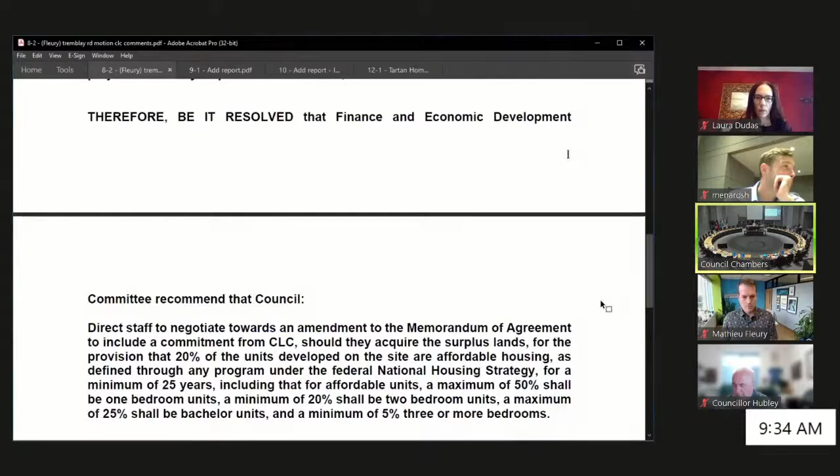I don't think it's necessary for me to read those, but I will read the 'be it resolved' that the Finance and Economic Development Committee recommend Council direct staff to negotiate an amendment to the memorandum of agreement to include a commitment from Canada Lands Corporation, should they acquire the surplus lands, for the provision that 20% of the units developed on the site are affordable housing as defined through any program under the Federal National Housing Strategy, for a minimum of 25 years, including that for affordable units: a maximum of 50% shall be one-bedroom units, a minimum of 20% shall be two-bedroom units, a maximum of 25% shall be bachelor units, and a minimum of 5% shall be 3 or more bedrooms.

I am agreeable to the motion, and Councillor Fleury is with us to answer any questions. Thank you, Mr. Mayor.

So Councillor Fleury, with the will of committee, would you like to speak to this, since I know you're not able to stay, and have an appointment later today? Thank you, Mr. Mayor. I want to thank Peter Radke as well as the local councillor for working with me on the complexities of federal lands being transferred between federal agencies.

So we want to make sure that the value the land is appraised at reflects the intentions of the affordable units. We worked closely with Canada Lands Corporation, Tara and her team, to draft the wording of the motion. I believe Peter Radke from real estate, as well as Tara from CLC, are comfortable with the wording presented today.

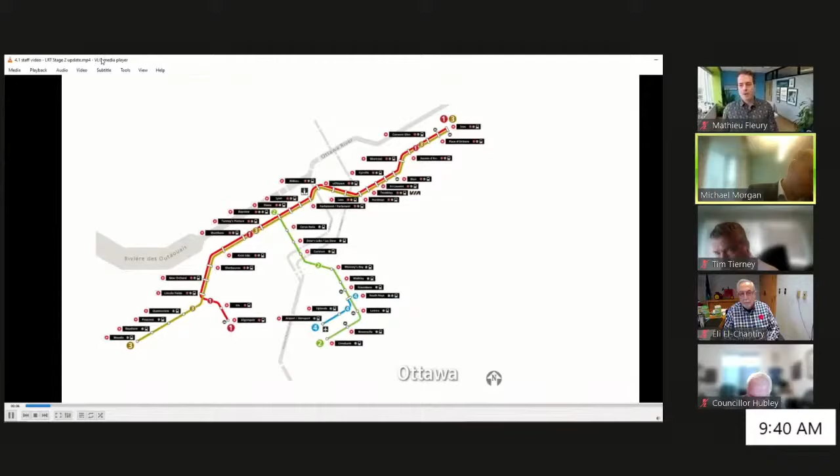Very good. I think we have a video to start, so we'll start with the video if the clerks could bring that up. So your mic is a little off there, Michael. Are you using a regular mic? I can switch, I'll switch while the video starts. Yeah, it seems quite echoey. So I think your video is running now.

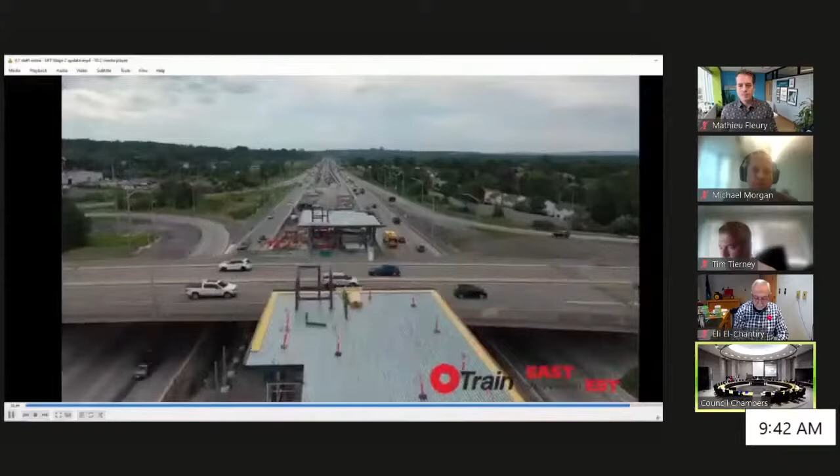So as you can see from the video, lots of progress on the two lines there. I'll bring up the presentation here just to give you a blow-by-blow update on the construction in the various parts of the city. While that's going, I'd note that in the video we showed one little section of the cut and cover tunnel — that was actually the first section of the cover being covered over. We're topping out the tunnel in many sections along the SJAM Parkway, and we've actually covered about 200 meters out of the 2.8 kilometers that we need to do. So still lots more tunnel to build, but we are making progress.

So we'll go right into the second slide, which is just a reminder of all the things that Stage 2 is bringing: 77% of Ottawa residents within 5 kilometers of light rail, creating 27,000 full-time jobs, the system capable of carrying up to 24,000 customers per hour per direction during peaks at the ultimate build-out, replacing more than 900,000 annual rush hour bus trips, and reducing up to 110,000 tons of GHGs by the year 2048. So lots of changes, lots of benefits coming with the project.

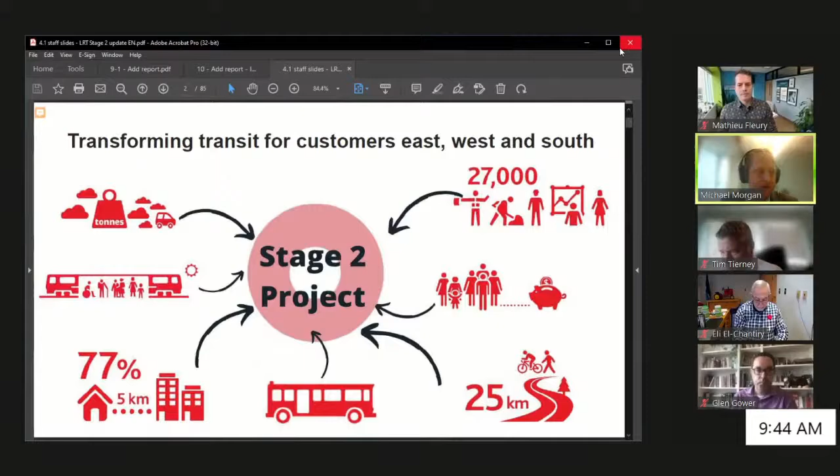We focus a lot on the construction progress. So if you go to the next slide, just to show you a reminder of the renderings available on the Stage 2 website. This is a shot of Moodie Station at the end of the line, where we're adding a new bus loop, and this is where connections will come from Kanata in the future and other local routes. As you drive by this area now, you can really see the elevator banks and other elements coming out of the ground very quickly. So a lot of progress at this site. If you go to the next slide.

So in terms of 2022 general progress, by the end of the year we'll have construction started at all the stations across the entire line. The last couple of stations to come online are Kitchissippi and Westboro. Kitchissippi is continuing to do excavation at that location. Rail installation on the O Train East extension is progressing, you can see a ton of rail now down in that area. And for cut and cover, I pointed out that small section of the cut and cover tunnel that's been covered.

The Stadler Flirt vehicles are coming, and the Alstom Citadis vehicles are still being manufactured and delivered to site. By the end of the year, 7 of the 11 pedestrian bridges we'll be building will be set in place, not open for service, but certainly available to show progress on those points.

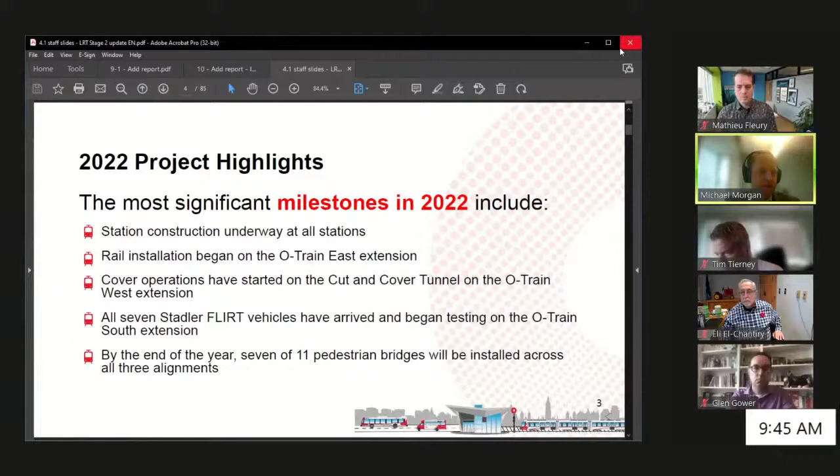So let's go give the general construction updates on the next slide. We'll go through this quite quickly, starting in the east. There are a couple of before and after shots in here.

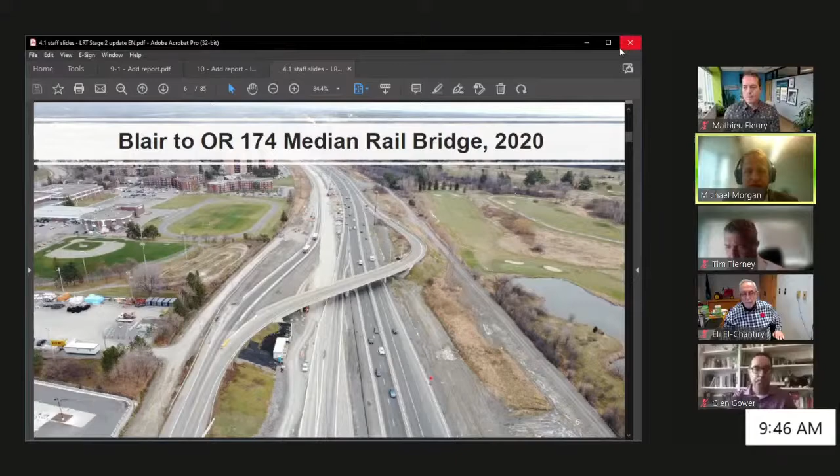Here you see the before in 2020 with the old transitway structure there. We saw in the video it getting torn down earlier this year, and obviously the flyover is in place now, and that road is in pretty good shape. If you go to the next slide, you see the new flyover that will be taking the trains to the center track. A lot of progress here, we've basically stabilized construction through this area. Now a lot of the effort is on the bridge itself, putting the track in place, and then closer to Blair doing the tie-ins.

So Montreal Station - a lot of work was done the last couple of years to make this space available to build the station. This is the view from up top, and you see the 2 elevator banks at either end of the platform, which will provide access from Montreal Road. Still doing tidy up, still doing work on Montreal Road itself. There's still some utility work to do, but the station is coming out of the ground nicely. We're trying to get all the electrical rooms in place so we can start doing communication system and signal system installation next year.

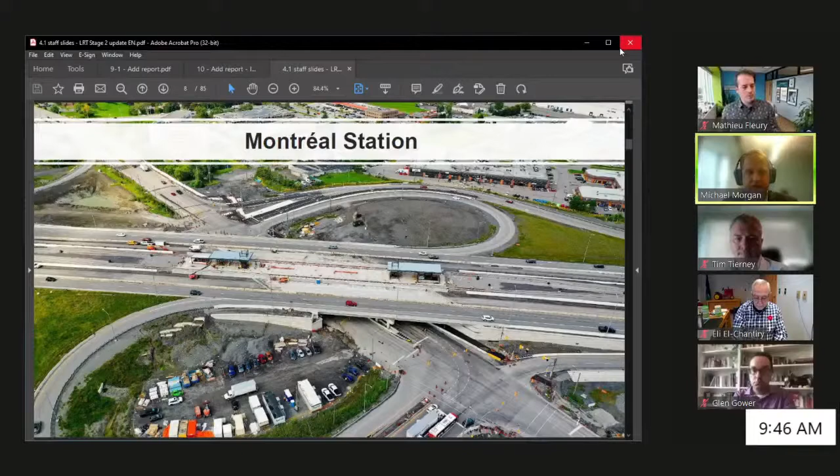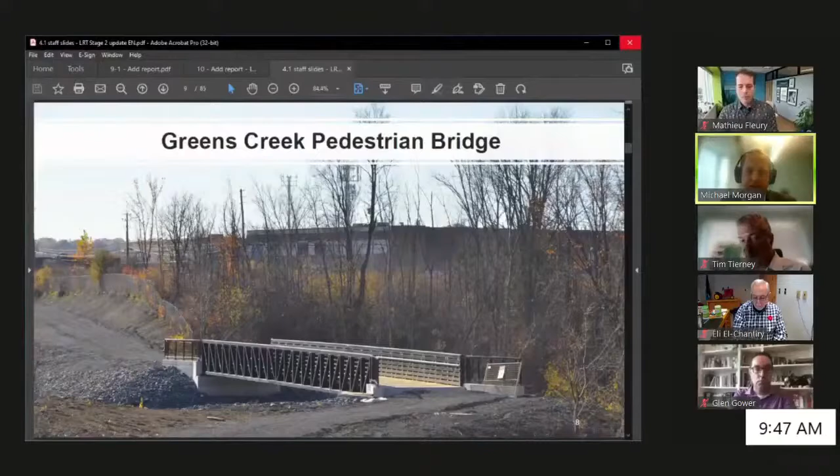Greens Creek pedestrian bridge - this was dropped in earlier in the year. This is still being worked on, the pathway that connects here all the way back to Blair. There's a lot of construction taking place to make that pathway from Blair to this location, but it is exciting progress here to see this bridge in place.

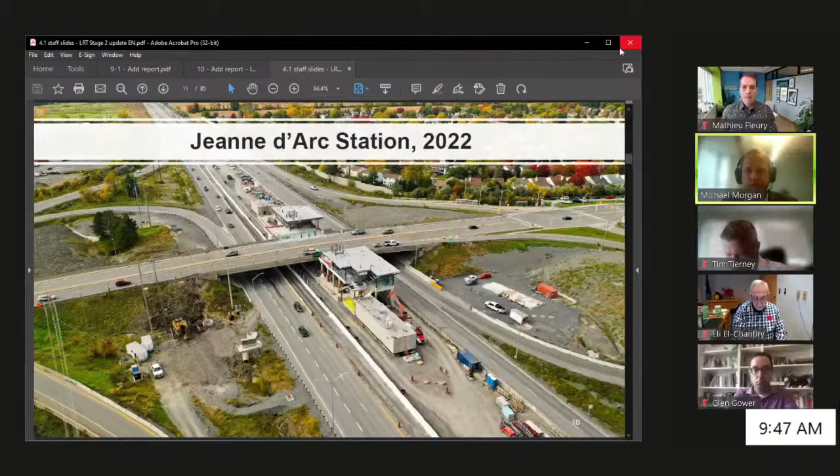Place d'Orléans Station - you see there are 2 structures here. The one on the left is the access for pedestrians coming from Champlain Street, and the one on the right connects to the original pedestrian bridge, and then to the new pedestrian bridge, which will enable people to transfer from the bus without having to go through a turnstile or fare gate. So you'll be able to transfer directly from here to the train. There's also one long escalator going from the structure on the right down to platform level, because there's quite a grade separation - an elevation change - at that location.

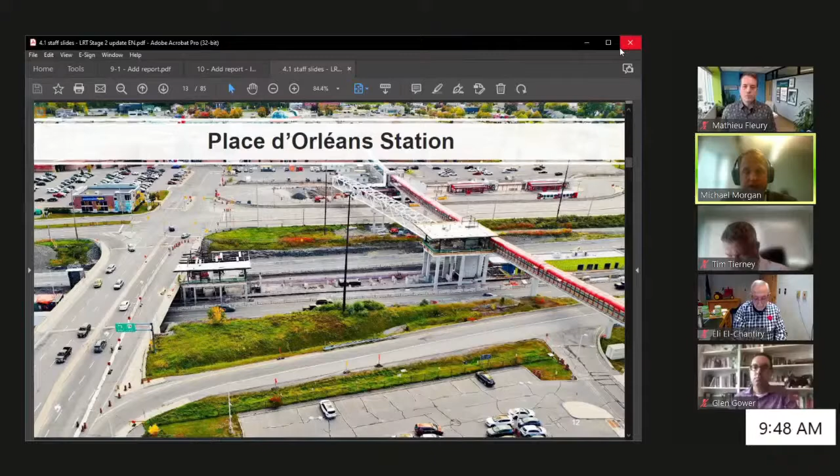If you go to the next slide, it'll show a slightly closer up picture of this new pedestrian bridge that we're putting in place.

So there's a bunch of rework that we need to do with the bus loop to enable the transfer and ease of transfer at this location without having to go through a fare gate. But at the end of the day, this provides significant extra capacity for people coming and going from the LRT station and the bus loop, in addition to the red pedestrian bridge there, which is the free-flowing pedestrian bridge to get to the mall.

Go to the next slide.

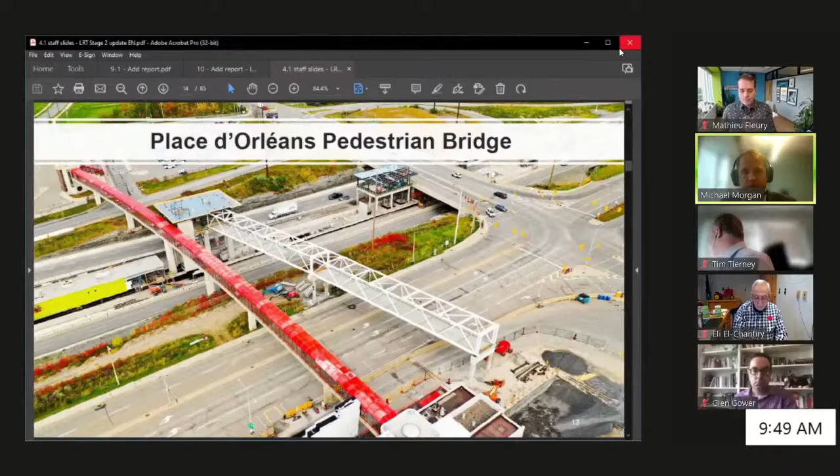Go to the next slide, please.

So Trim Station. It's a little difficult to make out, but there's one dark gray hydro pole just to the right of the page, and just to the left of that, there's a couple of pier caps, which are for the pedestrian bridge that will take you to the LRT station.

So we're going to have to do a closure of Highway 174 at this location to be able to drop that bridge in place, and then we'll have a pedestrian bridge basically dropping down to a new building entryway with the fare gates in the bus loop.

And again, this location will have free-flowing access for buses that drop passengers off, and there will also be a set of fare gates for people coming in off the street. So that pedestrian bridge will drop people into the LRT station at this location.

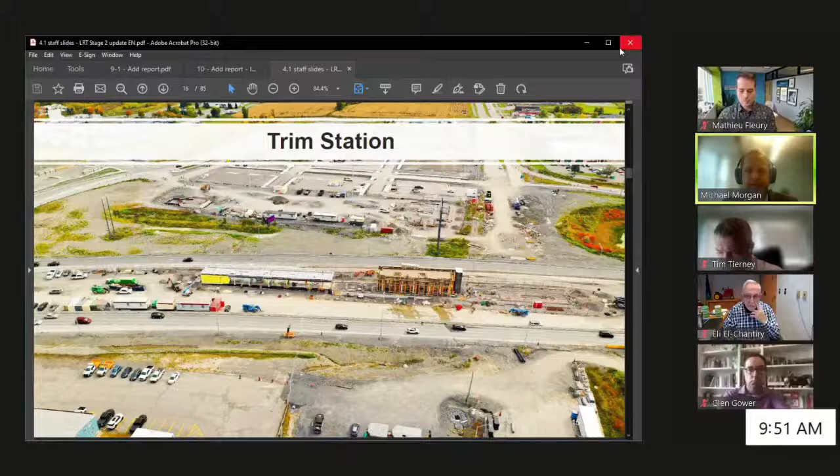So the upcoming activities: as I mentioned, the pedestrian bridge, progress on all five stations, completion of rail installation. And then next year, we are expecting to see our first train movements in this area. That's a very exciting milestone for the team, when you'll see the train in the middle of the 174 next year. Very excited about that.

If you go to the next slide.

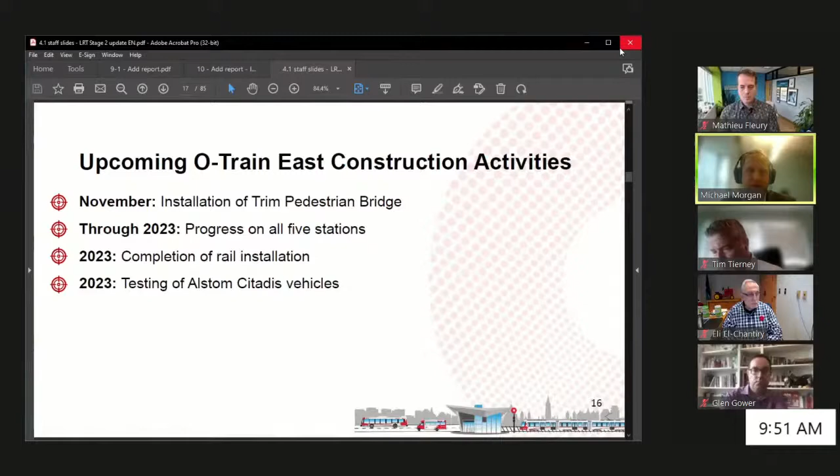Just in terms of the project, the latest update from the team is that they are 36 days off the original schedule, so they pushed it to January 1st. That being said, the end of the schedule has some float in it, and there's an opportunity to discuss with the builder what the handover process looks like. So we're doing that now, trying to recover those days, but generally the east is still on schedule.

Go to the next slide.

And then just finally, the mobility impacts in this area: weekend closure for putting that trim pedestrian bridge in, still a variety of lane closures kind of on and off, some late night stuff. And then on Montreal Road, there's some more utility works that need to be done at the station. So still some remaining impacts on the highway, but generally not like what we saw a year ago in terms of the super weekends and the continuous activity.

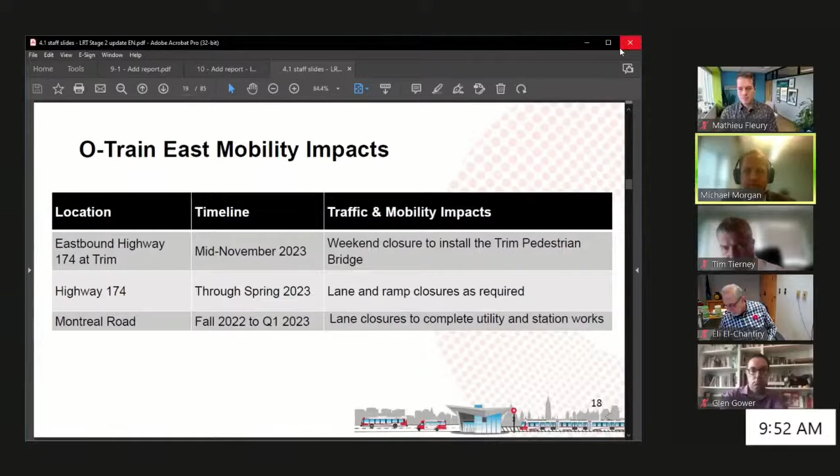Talk about the west, so just starting near Tunney's Pasture. You can see this is the old transitway. It's already been excavated, so they're in there now doing utility works. There's a big box culvert that needs some repairs, so they're going to do that work. There's a bit of a ramp down here to get into the guideway to start that retrofit work and make that connection to Tunney's. Go to the next slide.

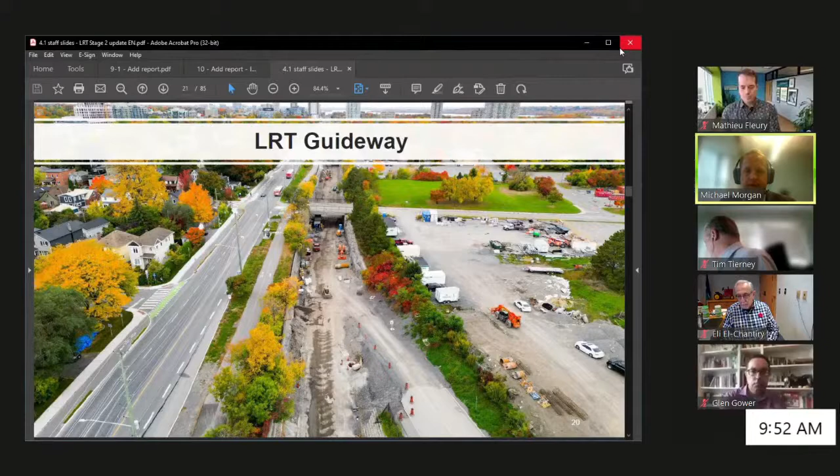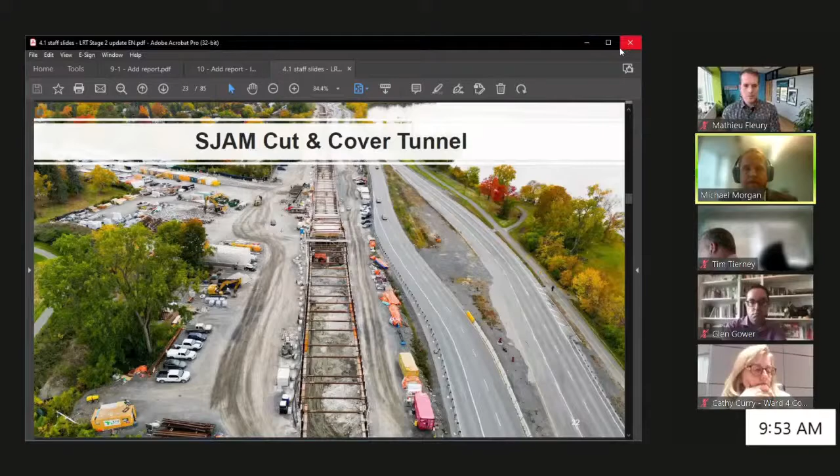Here's a shot of the tunnel getting closer to the homes, and just kind of hidden behind the header there is actually where we cross the road to get into Richmond. There's been a lot of discussion about that area, it's a very sensitive area. The tunnel's being built over the West Nepean collector, so there's a lot of sensitivities with that final connection across the road into the station location. A lot of work at this location, the SJAM in its entirety, and doing pretty well so far to keep the water out of that tunnel, but you see how close we are there to the river.

Here's the road connection where we need to cut across the road. This is a tough spot because there's a lot of big utilities here and we're over that West Nepean collector. What you see in the middle of the page there, they're starting to put together that Everest form to be able to build the tunnel. So they are making progress, moving on multiple fronts, but there are still a lot of challenges and sensitive areas to get through on this cut and cover tunnel.

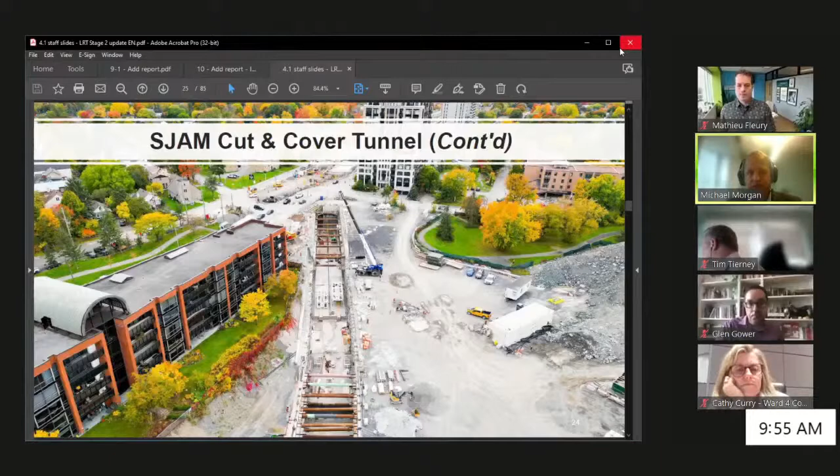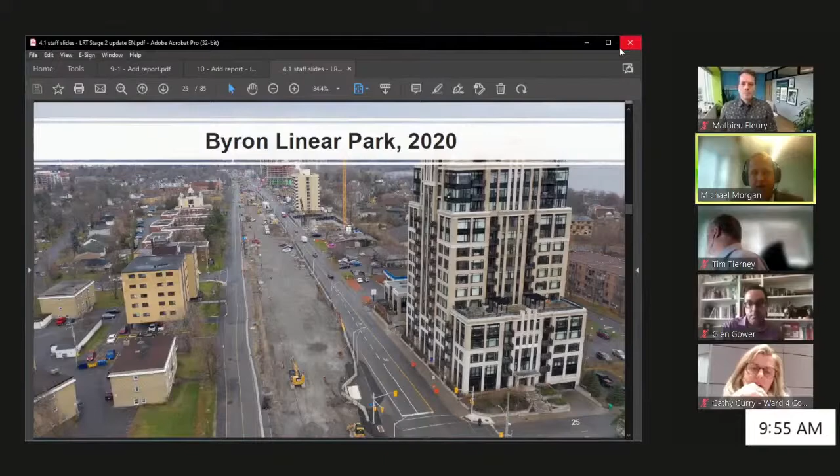Here's again a before of Byron Linear Park in 2020, and then the next slide shows you a bit of the after condition, not in the exact same location. You see the orange formwork at the bottom there is where we're building tall walls for the station, so those have to have an architectural finish. Then in the distance, as you move up towards the top of the page, you see the formwork come into play.

The guideway narrows because it goes from the station location, narrows to just the tunnel location. So a lot of work in this location, a lot of activity. Doing each one of those pours, like the orange formwork on the bottom left, takes about 12 hours, and there's a lot to do. On a regular basis, we're having to park concrete delivery trucks and pumper trucks on Byron Avenue to build those walls.

Here you see more of the covered section. Part of this, we do need some of the space for detours to make more space, but they are working quickly to try to get across here. I don't have a date on when the backfilling will start, but that'll be a big step. You see at the top of the page there's a bit of a plug where there's a road access, and what they'll do is shift that road access over the tunnel so they can finish off that section. They'll do that progressively as they move through the tunnel area.

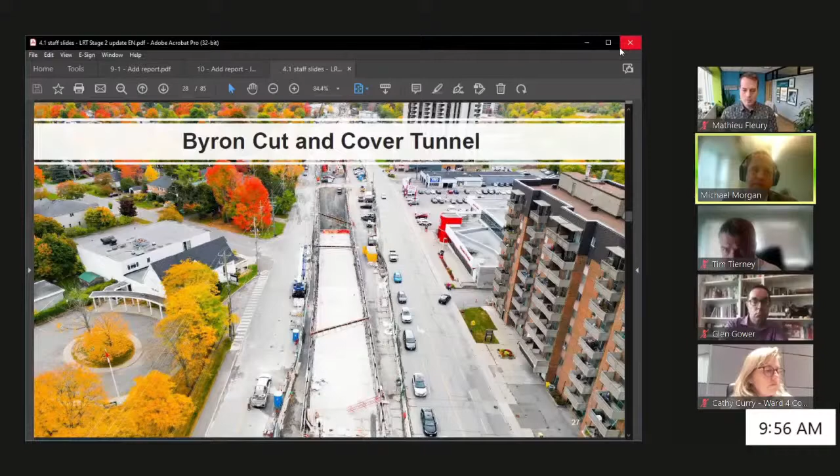This is just a close-up of the formwork after the fact. You see how you get a very good finish on the concrete there with the Everest form system. Good progress there, and roughly 200 meters of the 2,800 meters has been completed to date. So next year is going to be a big year to make progress on this, and they are going to work on these sections over the winter, doing as much as they can. They've come up with a temporary tent structure that they're going to move along the guideway to help them continue the progress of this work during winter.

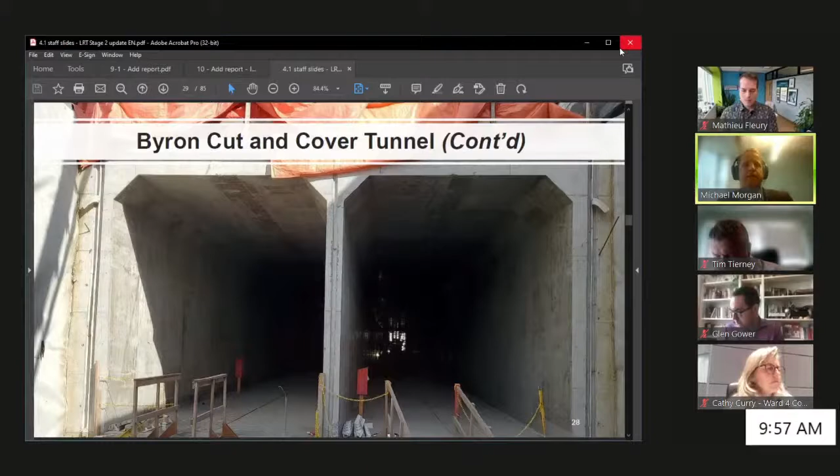We're adding a new ramp to get buses down to the new lower loop. We'll show you on the next page the current status of this location.

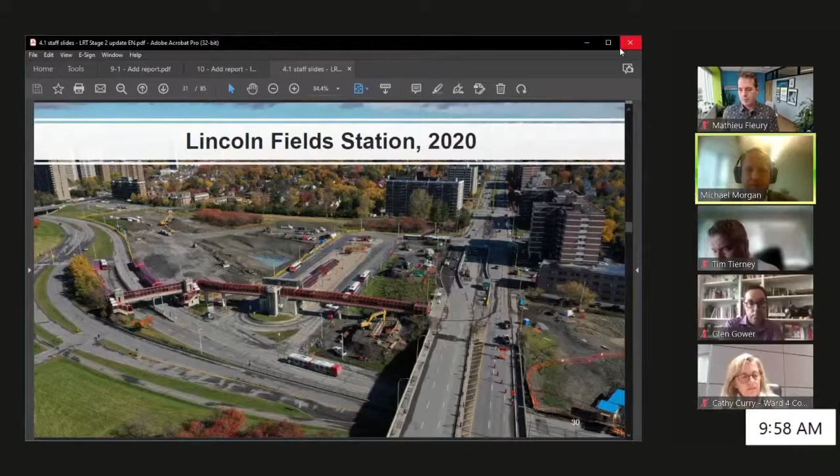So at the bottom of the page on the left, we've built a new temporary bus loop. You see the old pedestrian bridge for the transitway coming apart. Right now buses are navigating across on the top left where the guideway is going to run, so we're actually going to have to detour the buses using a new ramp to stay away from that area as we build the guideway, basically on this page left to right. And on the right-hand side, Carling Avenue, we've had to put in a new bridge and build a structure to make space under the tunnel for the LRT at this location.

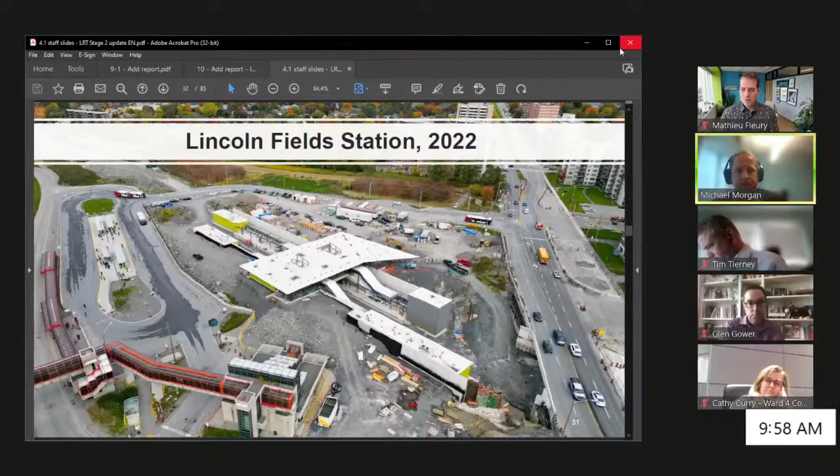Just another shot of Lincoln Fields Station. Here you can see the new bridge on Carling Avenue where we've created space for the LRT to go underneath. On the right-hand side is where the temporary bus loop is, and in the end state the bus loop is actually on the left of the screen. Where those trailers are parked, that's where the ultimate configuration is going to be.

Carling Avenue Bridge there. So we are making space, and we are reallocating some of the sidewalk space to the system to make it as friendly as possible to get to the station. If you go to the next slide, please.

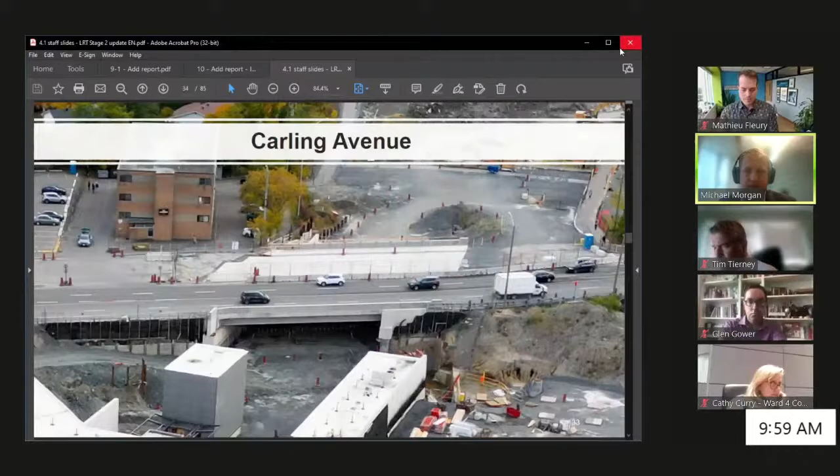Just a little bit further down the line, you see Lincoln Fields flyover, and then in the distance you see the Woodroffe pedestrian bridge there. So a lot of work happening in this area.

We are keeping the transitway in this area open as long as possible. The transitway will stay open and will be maintained in parallel with the new LRT guideway that we're building, that goes up to Iris. But a lot of activity, and we need to basically make the connection through this location back to Lincoln Fields. That's where you have a 3-track station, and that's where the trains split - trains will go south to Algonquin, and then trains will go the other direction to Moodie.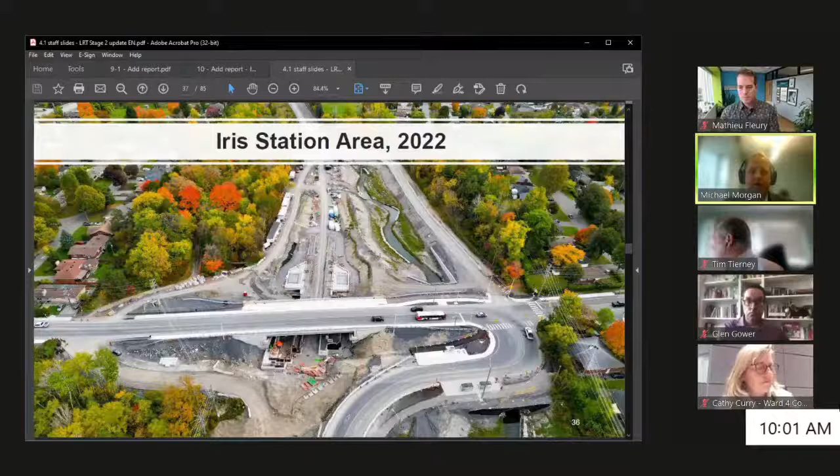Algonquin Station. On the right there's a pier where the new pedestrian bridge is going to provide a direct connection from Algonquin into the station. The station's coming together very nicely. There'll be a bus loop connection here. This is one of two buildings being built, and then the station at this location is underground.

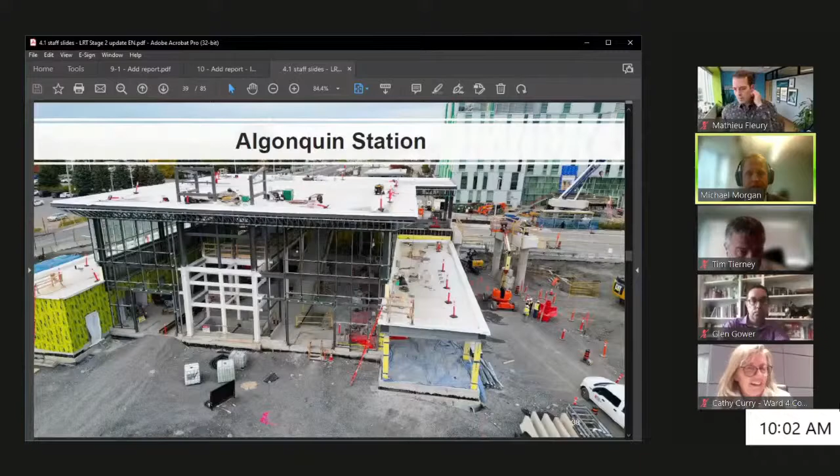Switching from Algonquin Station, the southern leg, back to the leg running to the west, Queensview Station here. This is what you can see on the right-hand side in the middle of the page. There's a bit of a green area where a footing is going to be poured. We're putting in a pedestrian bridge over the highway so people on one side can get to Queensview. Top left, hiding behind the banner, is the existing Pinecrest bus garage. We're doing a lot in this area to improve connectivity, providing good access to the businesses and homes here.

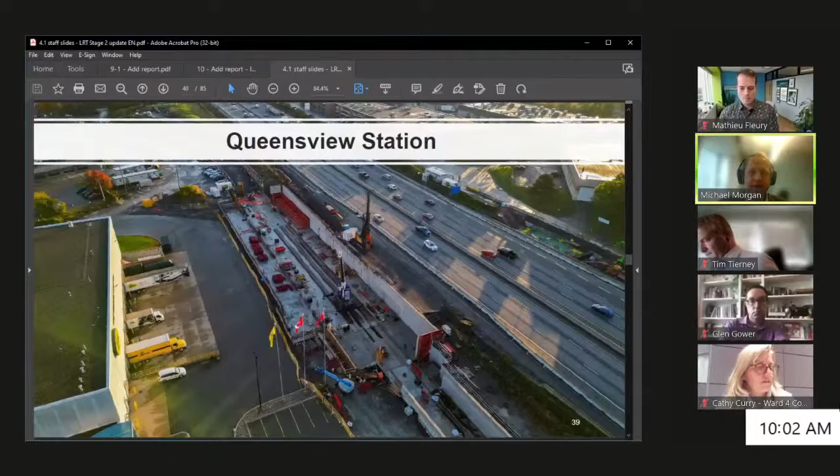On the next slide you'll see the progress on the station. We've moved ramps out of the way to make space for the station and created a bridge structure that we pushed in place last year. So the structure - you see the one ramp with the blacker looking pavement was rebuilt, and the Pinecrest Station there is coming together. Those struts that go across the two walls are permanent, and there'll be a bit of a bus loop on the upper location of the page, and off the screen is all the new ramps we're rebuilding to make space for the LRT.

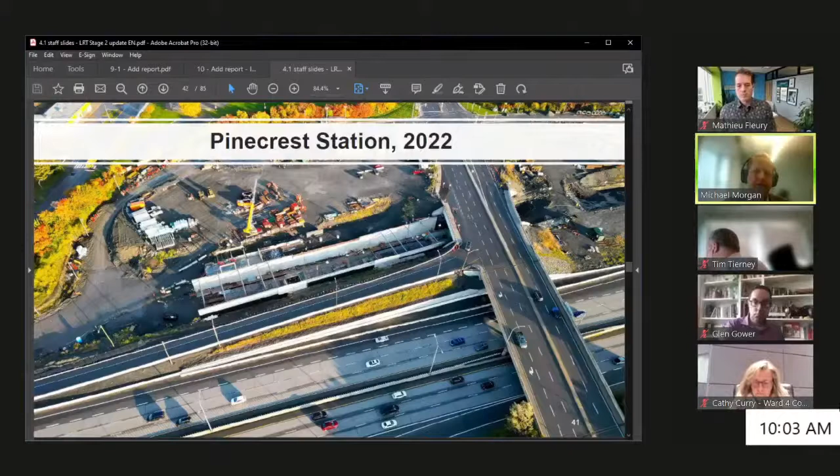Bayshore Station. This is where we basically have access to the guideway. We're repurposing as much of the building as possible to make way for the new LRT, and then there's a bit of a bus loop. There's been a lot of changes in this area to accommodate the buses and to deal with the temporary bus loop configurations.

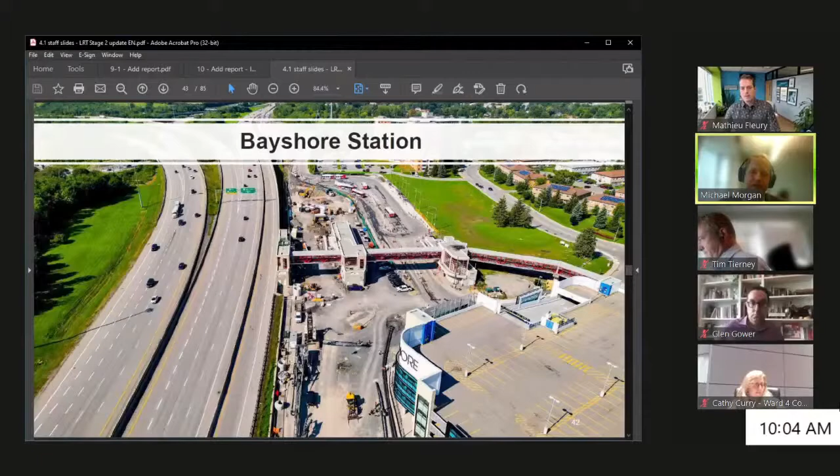Moodie Interchange, again another location where we had to rebuild all of the interchange ramps to make space for the LRT to go under the structure.

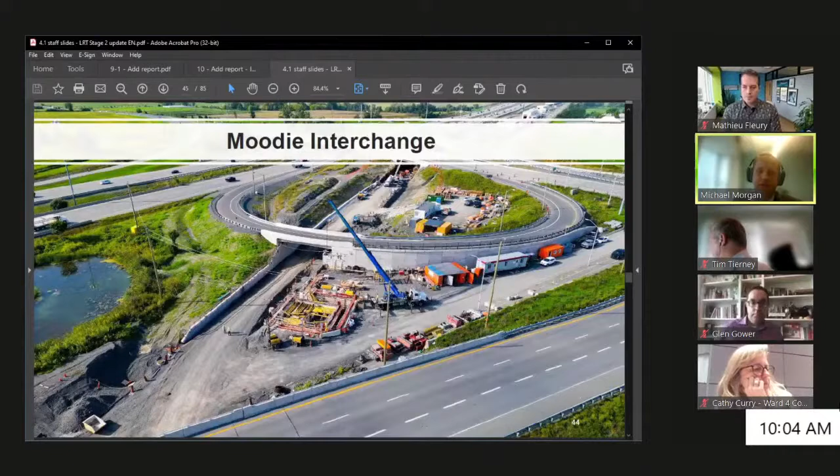A couple slides here on the maintenance facility. We're starting to see the maintenance facility stabilize in terms of the work being done. It is still on schedule. The original schedule was for handover in 2023 so we could use it for additional vehicles. We're working with Kiewit Eurovia Vinci to come up with a plan to deliver vehicles here to enable early testing, but also for a space issue to provide more capacity at Belfast just to move trains around. Good progress on this site, still scheduled for handover in 2023.

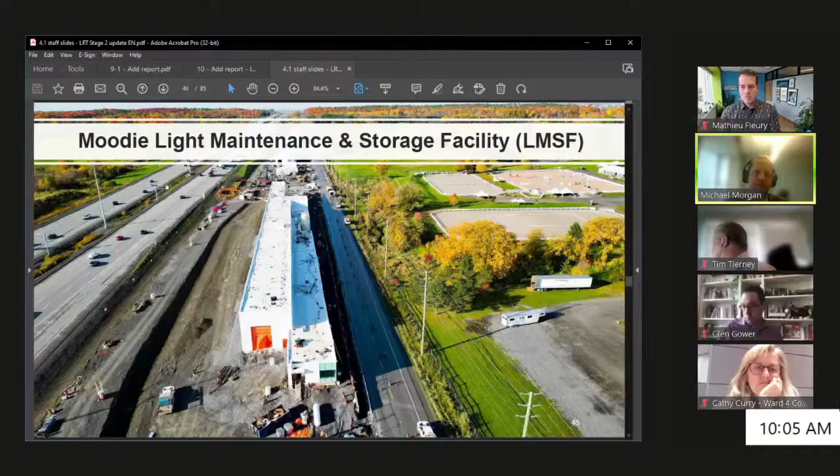What you're seeing in the middle is a very large substation we have to put at this location to provide power to the nearby station as well as to the yard. A lot of electrical activity needs to be done over the coming year to get this into service.

And then just a shot from up above. Next slide, please.

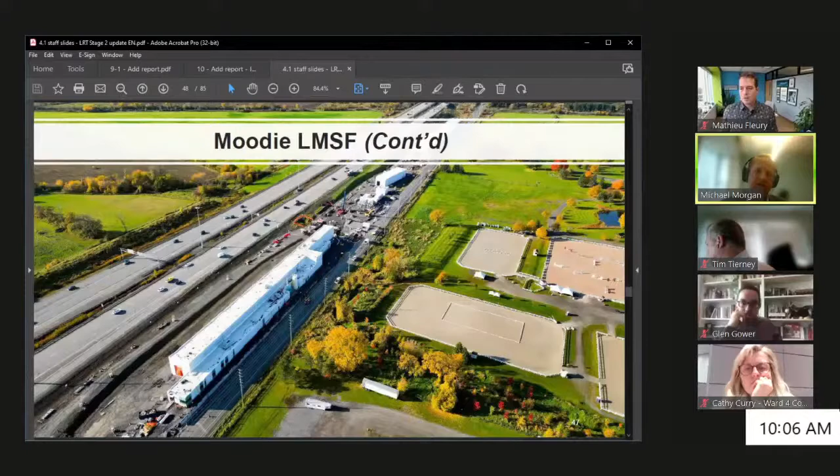One of the big milestones in the West was delivering the rail. We're going to start seeing rail go down in the yard and in the section between Bayshore and Moodie Drive fairly quickly. All the catenary pole bases have been poured and are ready to go. Once the rail is in place, the team will come back and start work on the catenary. But it's a big milestone getting rail delivered to the West, shown in this photo.

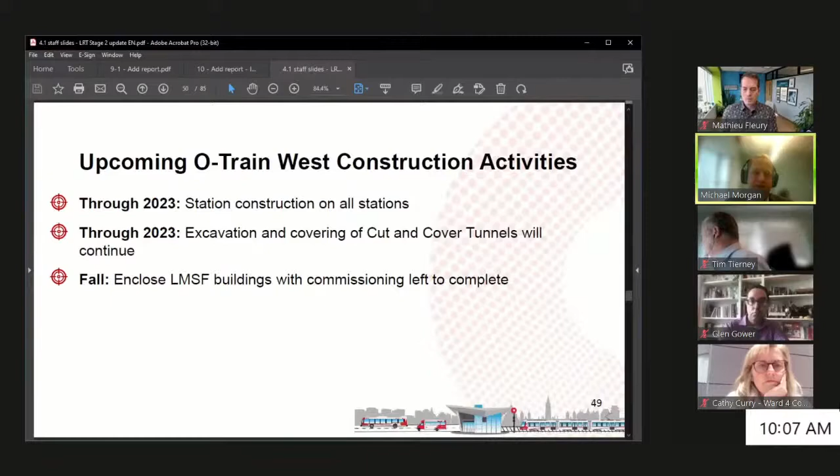Go to the next slide, please. So just some upcoming construction activities. Construction on all stations, excavation covering cut and cover tunnels will continue. The big challenge right now is that productivity levels on the cut and cover tunnel have not achieved what we need to maintain schedule, and I'll talk about that in a second. The LMSF buildings are basically getting closed up for the winter so interior commissioning can happen and handover can happen for 2023. LMSF is certainly a success story on the West for us on this project. If you go to the next slide.

One of the challenges on the West project is really the production levels to build the tunnel - the availability of concrete, rebar, and waterproofing material has impacted the project. There's a shortage of resources to build the project, so they're struggling to maintain the schedule in this area. We're seeing a delay of 17 months in the West. There are still discussions to be had with the consortium to understand how much of that can be brought back next year, and what opportunities exist at the end of the project during commissioning to take lessons learned from the East and apply them to the West to catch up some of that time. So we are in delay in the West, still on schedule in the East, but just wanted to give you that update on the project schedule.

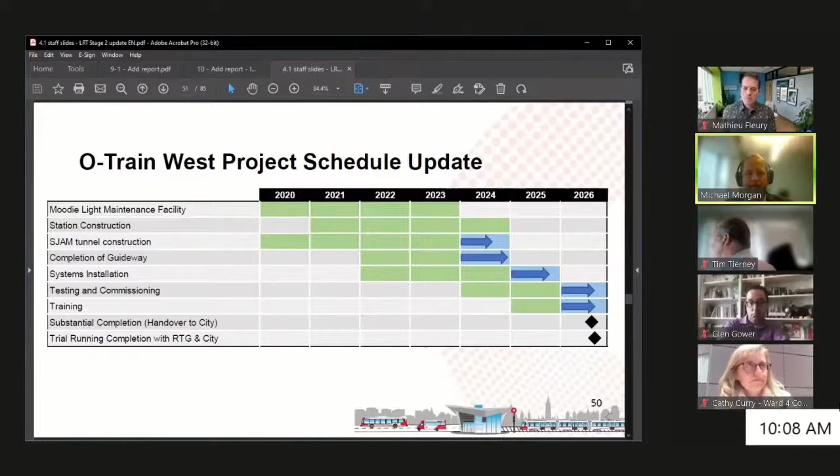So we go to the next one - there's another list of some impacts. Carling Avenue - we're finishing off the bridge there, hoping to reinstate traffic to a normal condition. Transitway, that's essentially a Pinecrest to Bayshore permanent closure now that we've handed that over to Guideway. The Highway 417 and Pinecrest interchange - the westbound off-ramp is still closed to traffic, and we're working closely with them to understand when that will open, but I think they're seeing a couple of months. Originally they were hoping for spring, but now it looks like it will be through the summer. And then there's some work to be done to get the pedestrian bridge in place at Queensview and some other things, so there would be some additional closures needed on weekends to get that work completed.

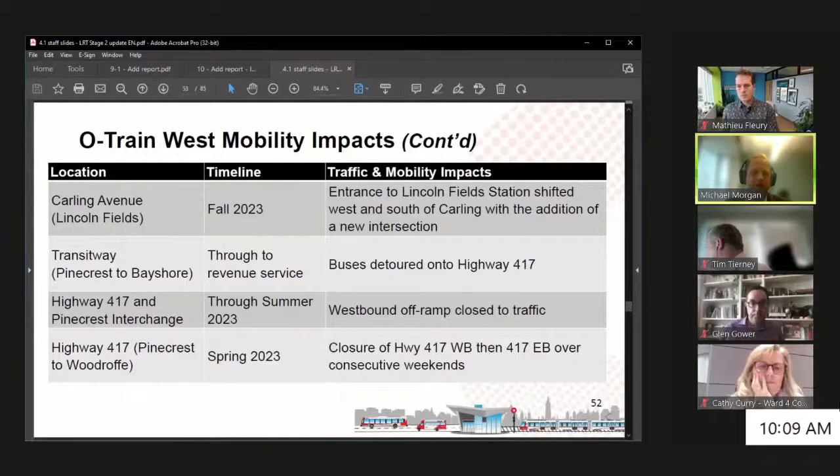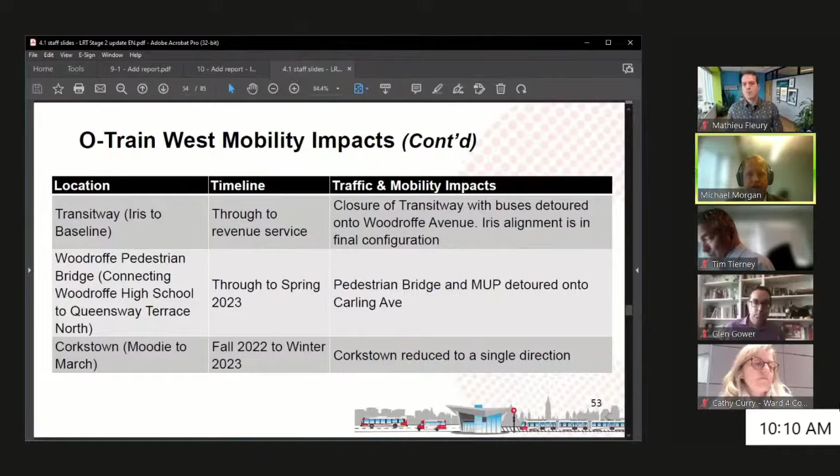Let's go to the next slide. This next slide talks about the Algonquin segment. The Iris to Baseline section, we've closed that. Lincoln Fields to Iris, we're maintaining that in place. The Woodroffe pedestrian bridge, we're looking to get this back in place and open it up in the spring of 2023 - we ran into some challenges with utility works in that location. And at Corkstown, there are some impacts on station construction on Corkstown Road, so we're going to have to reduce to a single direction for a period - but again that's just temporary. The final condition for Corkstown Road is a two-way condition. Go to the next slide.

In parallel with the project Kev is doing, we're still producing more Citadis vehicles. Nine have been accepted, with four in final testing and inspection, bringing us to 13. We're expecting a couple more, which will put us in good shape for fleet size for the east opening. Additional vehicles won't be required until we open the west, so we're in good shape there.

The transit team is still following up on some of the stage 1 issues to make sure those are all cleaned up in time for stage 2. Let's go to the next slide.

If you go to the next station, Corso Italia, on the next slide - here's the track work being installed at Bayview. You go by there, it's a lot of activity. In general, the strategy with track is they need to get it completed all across the entire Trillium Line this year to enable testing and the overall program next spring. I checked in with the team on Monday, and they're at about 65% completion of track across the alignment. Much of the track you can't see because it's often in areas inaccessible by road, but they are about 65% and looking to finish it all up this year.

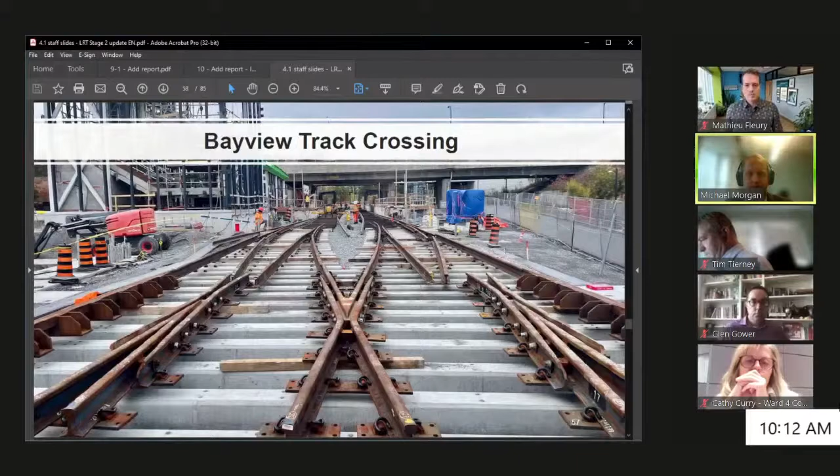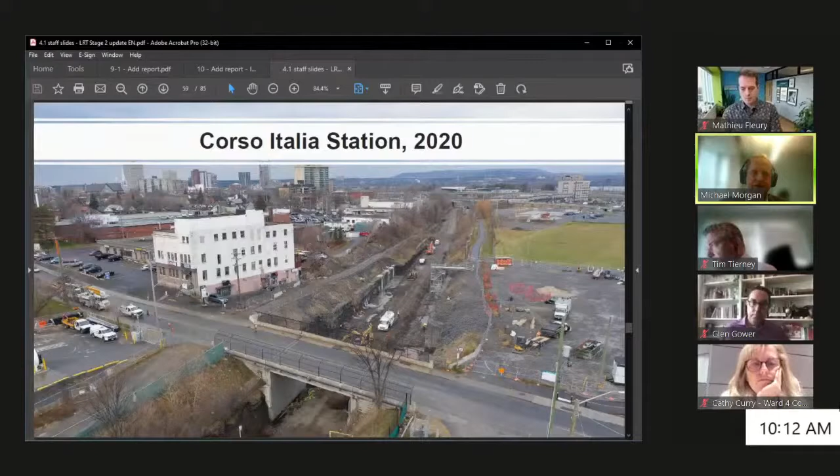So this is the before of Corso Italia. A couple of years ago, we were just getting set up to do the excavation in this area. If you go to the next slide, you see the current progress.

So go to the next slide.

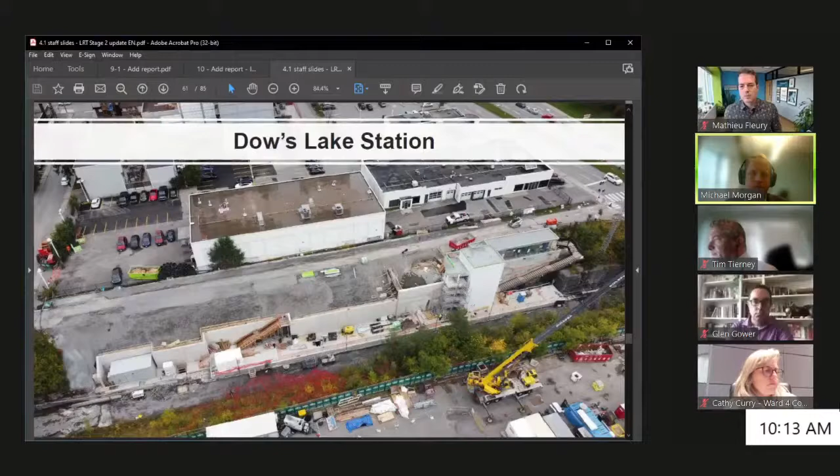Go to the next one - Carleton Station. One thing you'll notice is the yellow barrier on the edge of the platform. We used to have platform extenders that were intermittent on the original system, but now we've done a platform extender that's the full length. When you see those platform extenders, it shows the platform's almost finished. They've put down thin plywood to protect the surface while they finish construction, the fencing's going up, the platform transit shelters are going up. This is coming along nicely, and they're expecting to get track through this area shortly if they haven't started already.

So just another view there - you see again that platform edge extender, and down the middle is where there's going to be an inner track barrier. They're generally at the point now where they're into the finishings and electrical work at this location. Good progress at Carleton.

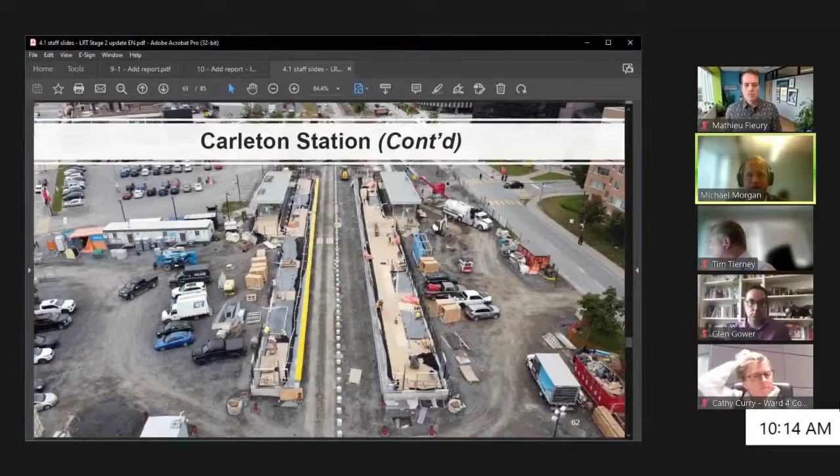A couple of big things going on here. The river pedestrian bridge was dropped in place - it required a very large crane that had to be rescheduled following the operator strike for that structure. In the middle, they're starting to demobilize now at this location and take down all the scaffolding, but that's the original train bridge, which is being essentially rehabilitated to give it 30 years more of life. It'll be rehabilitated at the end of the project as well.

A lot of work was done on that bridge and structure, especially on the southern side. The pier required a ton of extra work, so kudos to TransitNEXT and their engineers for doing repairs and getting that in working order. Still a lot of activity in this location, and a lot of questions about that pedestrian bridge. I know there's a lot of excitement about it, but at this point it's going to be next year before it opens.

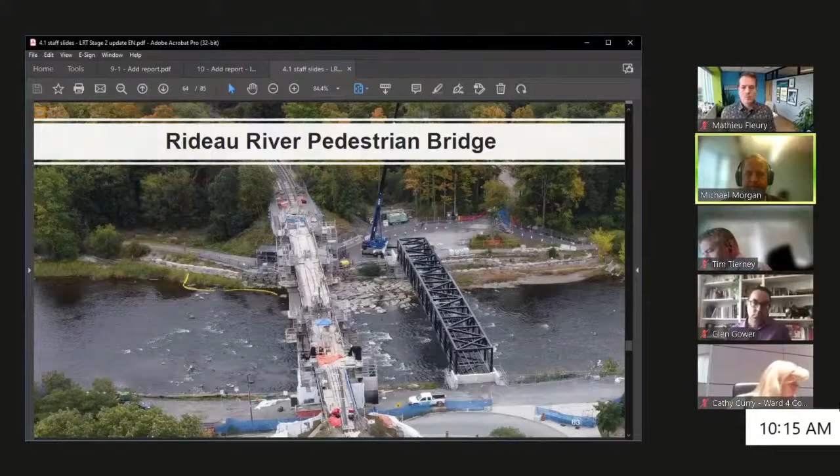Mooney's Bay Station - this station is pretty advanced. You see that plywood down on the platform is meant to protect the surface of the station. They are making good progress and bringing track through here pretty quickly.

Ellwood Diamond - this is the grade separation over VIA. They've been making very good progress here. They are looking at reinstating the original multi-use pathway on the southern side, and I think they're actively working on it now. I don't know when it will reopen, but there are a lot of interfaces between the VIA Rail, the Transitway, the creek, and the multi-use pathways in this area. They've made good progress on this bridge, and this is the type of thing where they can actually bring the rail onto the structure over winter, so that's what they may do.

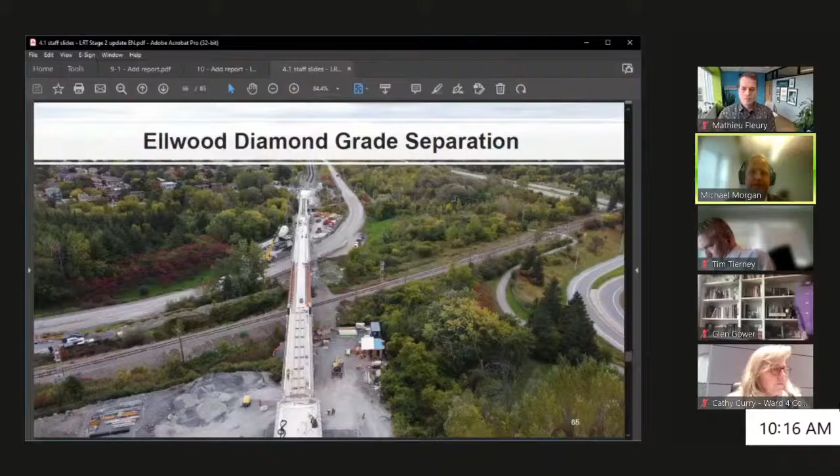Walkley Station - again you see that yellow platform edge extender in there. They're tarping up some of the elevator banks there to allow us to work on them through winter, but getting to a pretty good state here. On the right hand side you see the beginnings of the multi-use pathway that will go up to Walkley Road. We've spoken to the planning department, and there's a private connection through to Bank from the middle of the page, scheduled for 2023, being done through the local developer that put up the new rental building just on the right there.

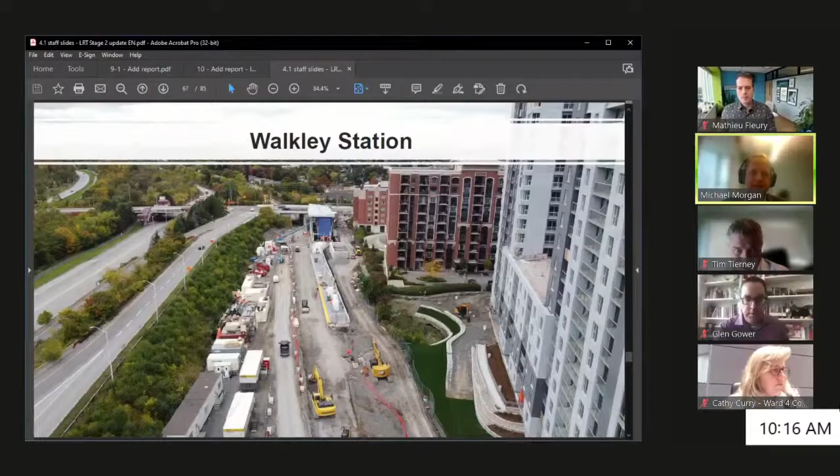The MSF - there's a couple of photos here. We're making good progress in terms of the MSF. I believe the gas connection is all done now, so they can start final commissioning on all the systems ahead of getting occupancy. This is the primary maintenance building for the heavy maintenance as well as the light maintenance, with an administrative building on the left.

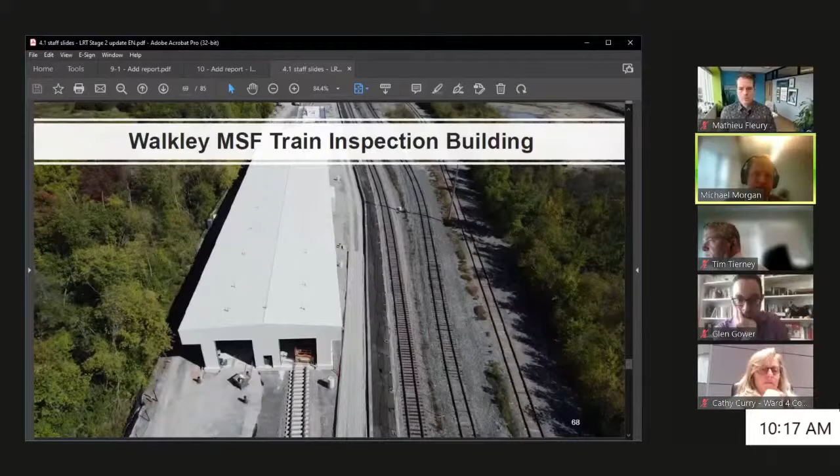This shows the train inspection building. There's actually quite an increase in capacity here - we've got the 2 full bays in the maintenance building, and then 2 full bays in the train inspection building. This building is what they'll use for washing the vehicles, refueling, resanding, cleaning the vehicles, and making sure they're ready for the next day. So a lot of extra maintenance capacity at this facility now that we've done the expansion.

Guideway progress - I spoke about it briefly. This is a shot looking south, where the track disappears into the forest and you can't follow its progress. From here it goes, we created a test track down to Leitrim. There is track all the way through to Leitrim and beyond. There are some small gaps by Limebank and a couple other spots, but you also see where the vehicles will turn off to go to the airport on the right here. A lot of activity at this location, a lot of progress. We just need the final connection across Hunt Club to really close the gap here.

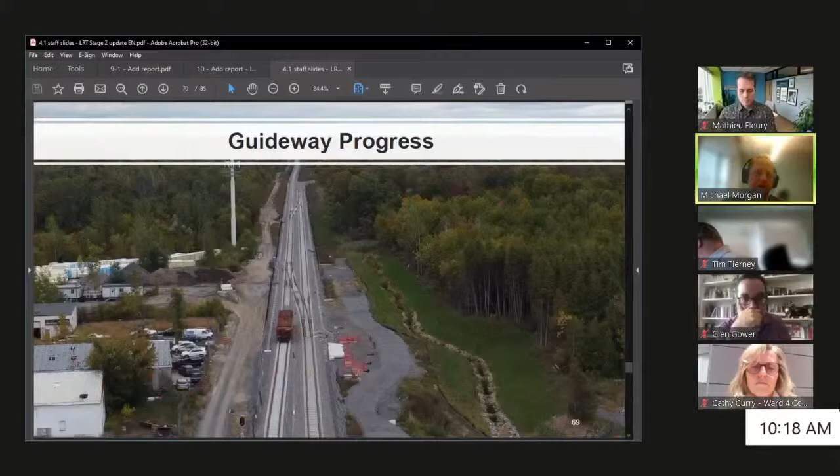Greenboro Station - this one's in pretty good shape, I think it's like at 80 or 90%. We're just finishing up. There are some glass barriers at this location with bird-friendly glass, providing a little bit of shelter because this location is a little bit exposed.

South Keys Station - you start to see at the bottom of the screen a bit of a three track structure for the passing movements for the airport train to come in and out. This station is coming along nicely, and again they're using some tarping to be able to work on the elevators over winter.

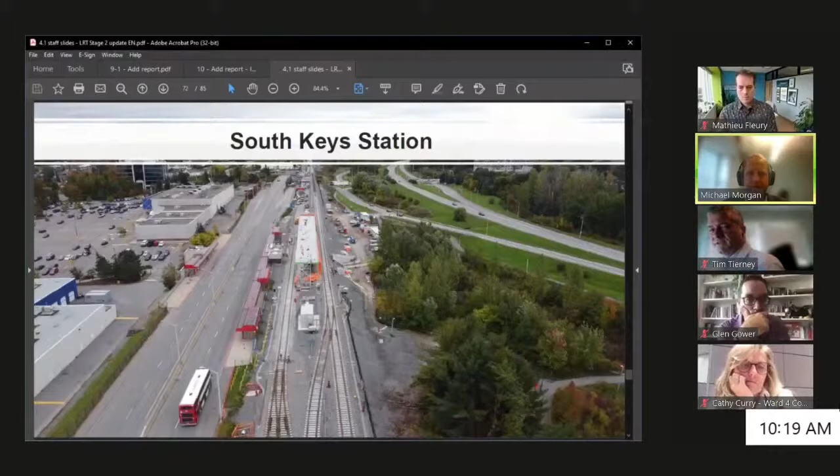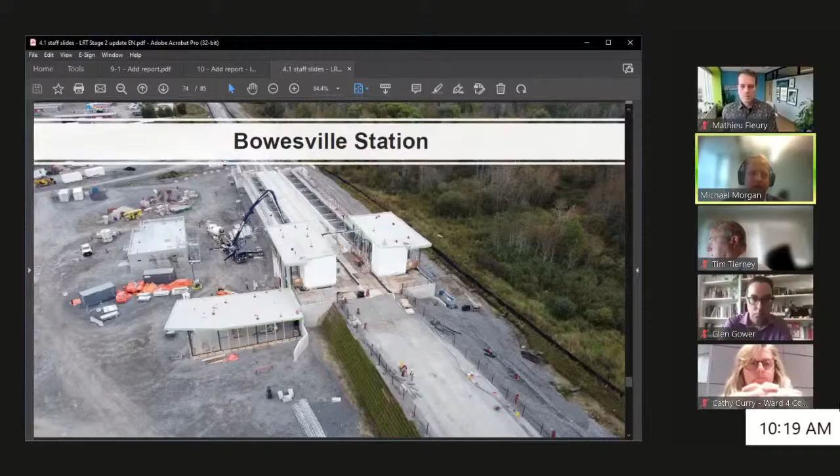Bowesville Station, so much further to the south. Again, you see the wrapping there to be able to work on the elevators during winter. You see the structures come up pretty well. The bus operator building on the left middle, and then the fare gate entrance in the bottom left quadrant. So it's coming together nicely. This station's pretty advanced, actually.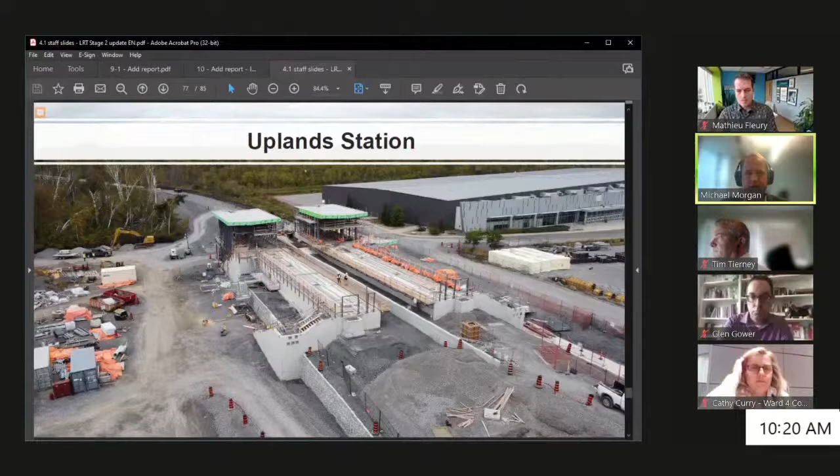You'll see the final approach to the airport on this slide and the concrete plinths - the rail will actually be mounted on those plinths. The train will stop at this location. There's a platform on the left, and then it connects to the plaza building that the airport has constructed. So they're in pretty good shape here to be able to come and get the rail in pretty quickly over the coming months.

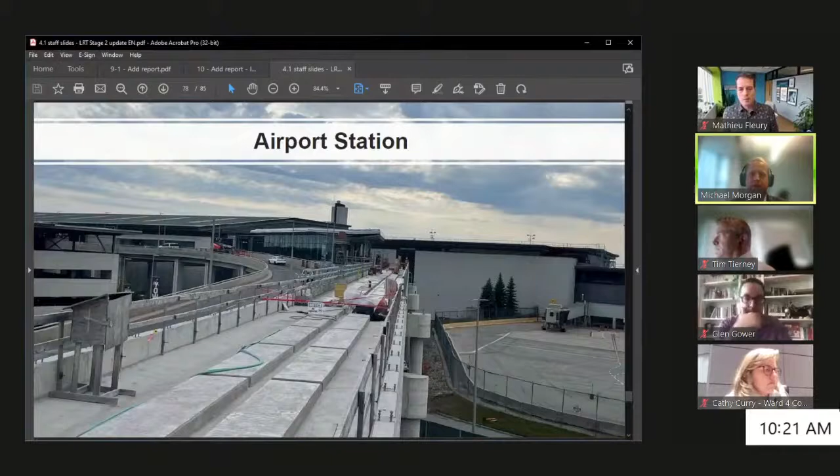Just in terms of updates - I got a text from someone this morning in planning talking about this, the Trillium pedestrian bridge. I don't know if it's going to still be called the Trillium pedestrian bridge, but the pedestrian bridge at Bayview Station is going in shortly. We should see that go in. Station and bridge construction completion - all the bridges, Hunt Club is really the last one that needs a little bit of attention.

Track across the network, we're at about 65% installed of track work, and then continued Stadler vehicle testing and commissioning. Those vehicles have been here for a while now, and we've been doing as much as we can. The next real big milestone for those vehicles is to be able to run them north and south across the line.

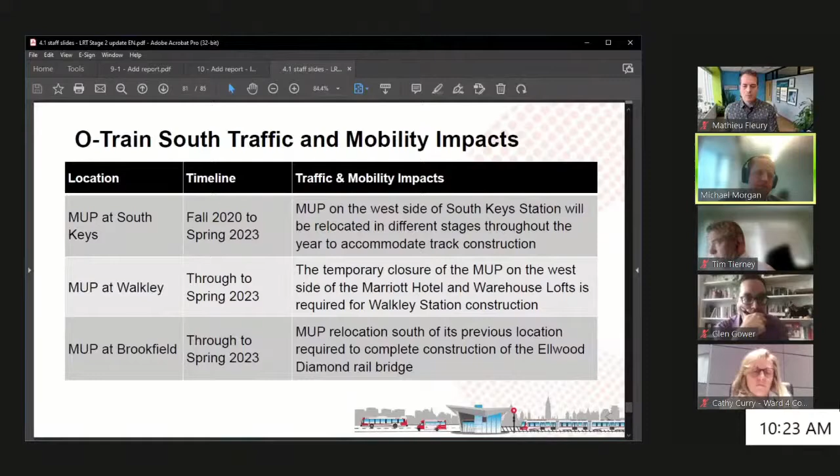At Hunt Club, there's going to be some on and off closures required to finish that up. At Earl Armstrong Road and Bowesville Road, we're realigning the road to take out that funny jog and put in traffic lights, so that's going to have some impacts to do that work.

Then at Carling Avenue, getting the utilities to the location requires some impacts. And the Trillium line MUP at Dow's Lake has some big impacts because of the utility connections. So we're still trying to close those out as much as possible.

Go to the next slide.

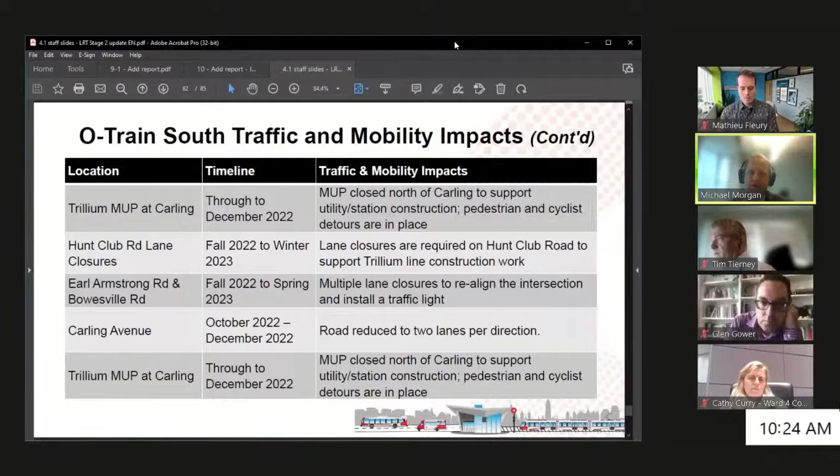So the Stadler FLIRTs, all 7 vehicles are now on site. They've all been inspected. The city team is very happy with what they're seeing in terms of performance, and I think the operators are quite happy with them as well. So those are all staged now at Walkley Yard along with the existing 6 Alstom LINTs, so we have the full fleet for the Trillium line ready to go.

And then the next slide is just the last one, which wraps up the completion dates and where we are. So South Extension is targeting an August, September timeline. O-Train East Extension is still on for end of 2024, and the O-Train West Extension is now pushing into late 2026.

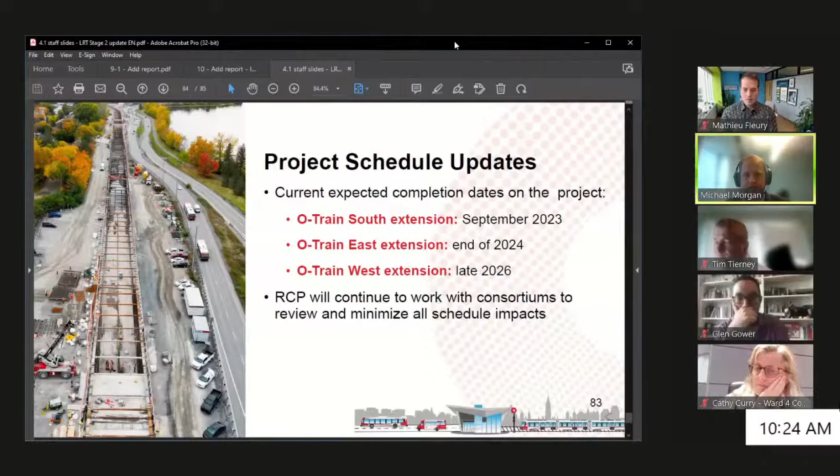So that's the end of my presentation, Mr. Mayor. Happy to answer questions if there are any. Great, thank you very much, Mr. Morgan. Just a couple of points.

One, with respect to some of the reasons for delays, I'm assuming it's supply chain issues, labor issues. Could you give us a little breakdown of what percent of the delays are as a result of labor issues, not being able to get people on site because of COVID and so on, versus supply chain issues? Is there something specifically with, for instance, the rail lines themselves coming from Spain? Has that slowed things down, mostly on the west, because east is in pretty good shape and south is not as bad as the west?

Thank you. Yeah, in terms of generally in Ontario right now, we're seeing a lot of projects in delay. We're seeing a lot of pressure on the availability of craft to actually undertake the work - people doing rebar, pouring concrete, building stations. And because we're building a cut and cover through the west, that has a big impact on the timelines for the project. And then there have been some challenges.

There's a shortage of cement in North America at the moment, and that's obviously affecting concrete production. They've had some challenges with rebar and some challenges with waterproofing. So it's hard to pinpoint a percentage, but it's basically a breakdown between some material issues - supply issues with rebar, concrete, waterproofing - and craft issues, things like rail.